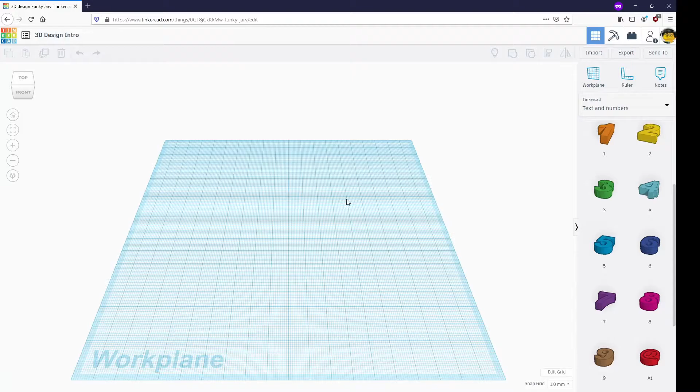My name is Mr. Martin, and today we'll be discussing some ideas for multi-piece prints and some tips on putting them all together. Let's get started.

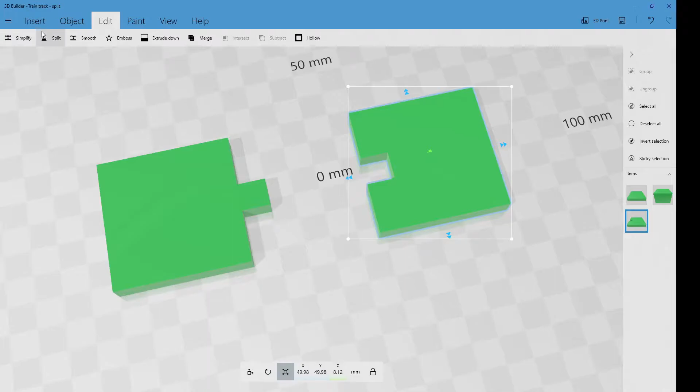First up, we've got a project that might seem pretty simple, but can be quite rewarding, and that is a puzzle. Yes, you can 3D print some puzzles. You can basically print the whole puzzle at once if you space out your pieces correctly, which is pretty nice. So let's say you've got an infant or a child, or even just as an adult, you want to create a really complicated one. You can start by making whatever shape.

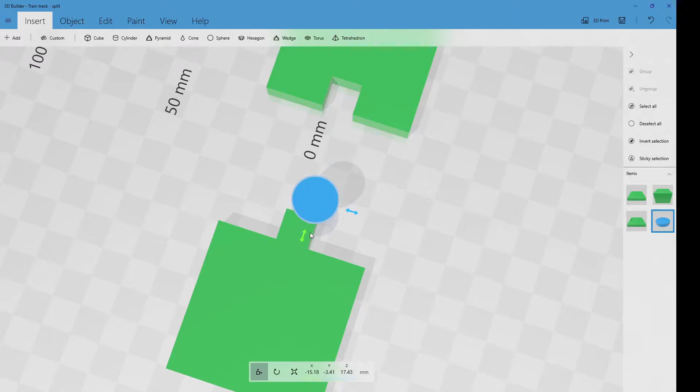Here we have two squares, and I've already done a kind of inlet. So you can see where the pieces will match up, and we're just going to add a round end to one of the pieces and then subtract that from the inside of the other piece. So for example, if you wanted to create your own map of the 50 states, you could do that. You can simply design every shape individually, find your own unique way of putting them all together.

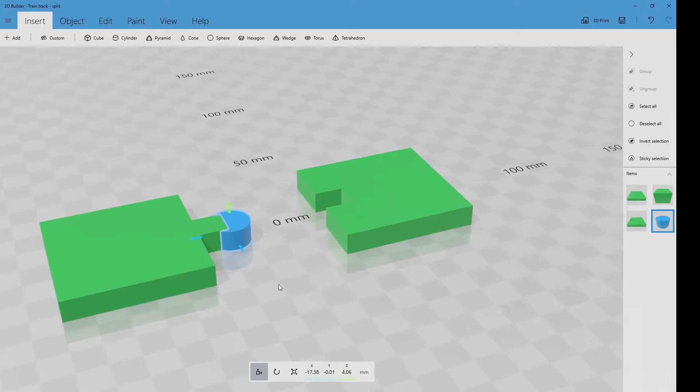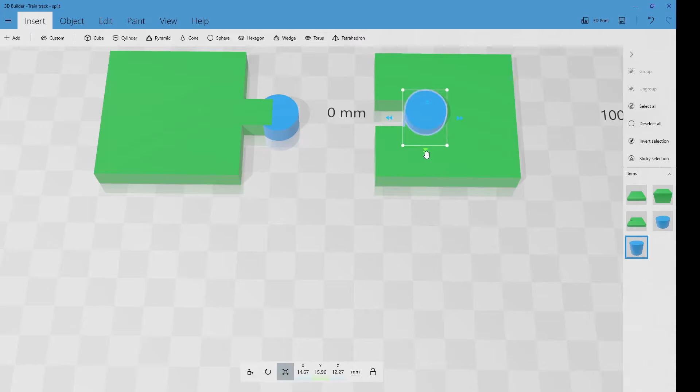And so in this case here, we're showing you how to just connect two pieces very simply, fairly quickly, and then you just repeat that process for every piece in your design. For a younger person, you would even then be able to add a handle on the top surface of every piece, further allowing them to create a simple puzzle that they can operate while still remaining challenging to begin with.

For more complicated structures that will remain relatively flat, for example, here we have this train set that's built into 3D Builder, the program we're using today. This already comes with some connectors, and this is just another example of how to put together these kinds of pieces. So you see here, you have that one standard connector that looks like two diamonds with a little rod in between.

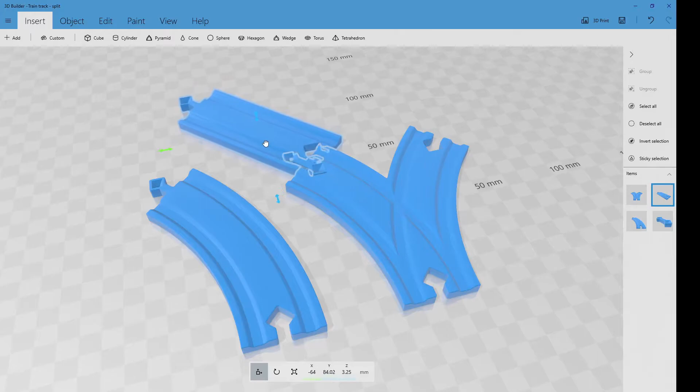And every single piece has either an inlet or an outlet, and that's what we're going to call them for now. And you'll notice how the pieces fit together. You can create your own custom ones on every piece in your design, which will help you put them together.

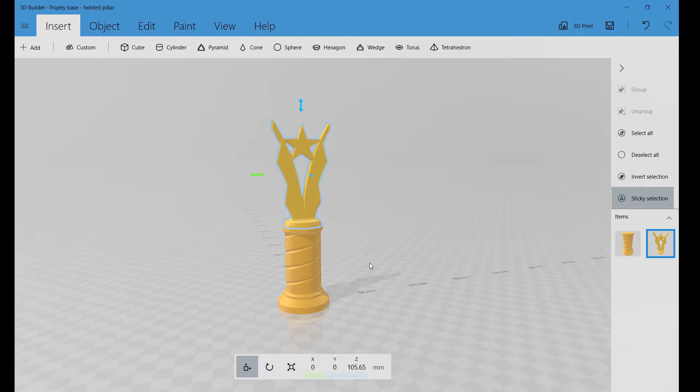And now that we've covered horizontal or flat prints here, what about something vertical? What if we wanted to put two long, tall pieces together? Well, here you can see that if we stack them, the pieces may combine. You can print it as one, or you can print them individually if you had longer pieces to connect. In this case, we're actually going to add a little cylinder to the top of the base here, and what that's going to let us do is create a bit more structural integrity where those two pieces connect.

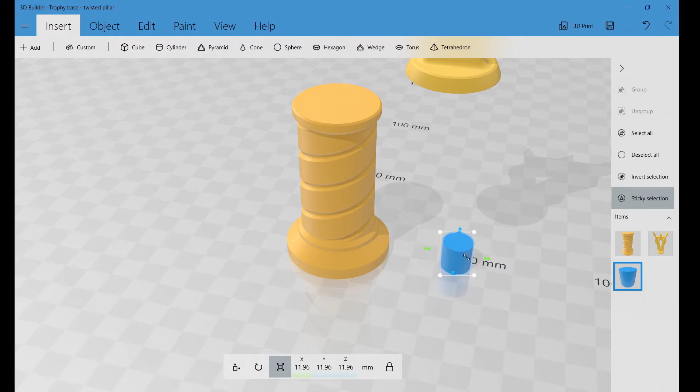Now, if we create a hole in the top portion of this, and it is the exact same size as this base cylinder that we're creating, with a little bit of magic after the print, either by sanding it down or heating or shrinking it to compress it a little bit, we'd be able to fit it inside to where it would attach very firmly without falling off. And that is the goal here.

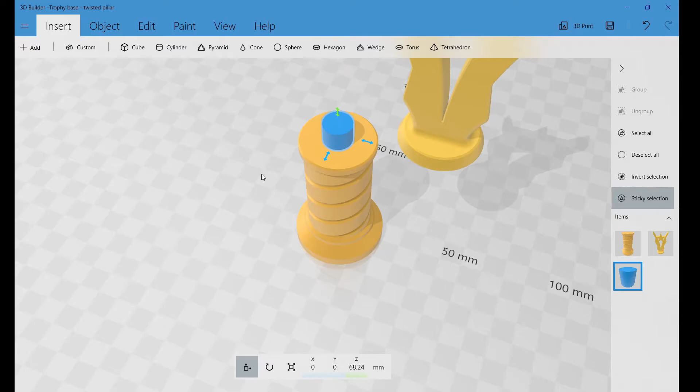So we're first going to attach it to the base, and then we're going to create a hole up top. So once we get this base cylinder to snap correctly, we're just going to resize it a little bit. It's just a bit too wide for my liking. That's going to make it a little bit more difficult to either sand down or fit inside the hole that we create up top.

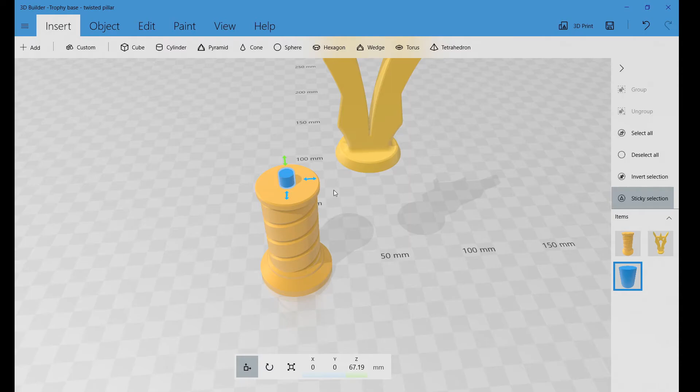And the important thing is to get the sizing done before you copy and paste it over, since we'll use that copied cylinder to create the hole on the top part. So it doesn't make sense to create the base and eventually have that be a different size than the hole you create up top. Then for sure your parts won't fit together.

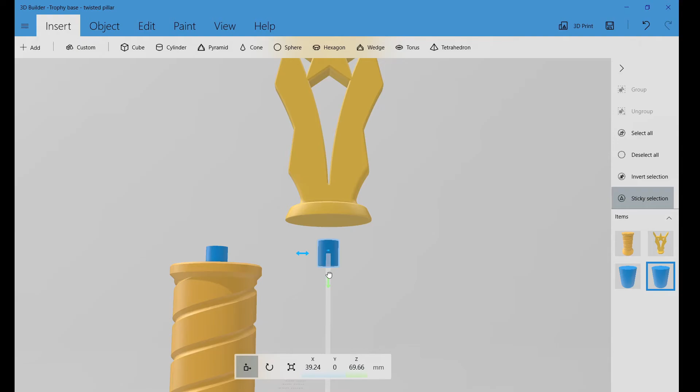So here, very simply, we're just going to move this on over. Obviously, it would not print as shown since we have an object floating in midair, which 3D printers can't quite do just yet. So we're going to line it up. Again, it does snap pretty nicely. And there are two ways to do this. Now, we could subtract from the top portion that I'm doing here, or we could reverse it, and we could instead create the hole using the base cylinder.

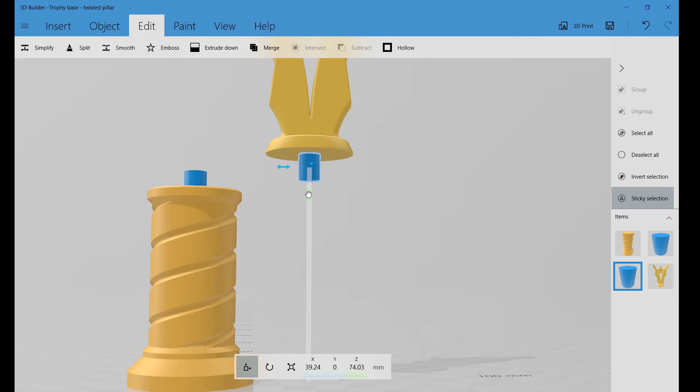So making sure that we have the right part selected here. Going to deselect the top portions here and only select that base cylinder. So here we've got it lined up. Deselect those and use the subtract tool here so it gets rid of that space on the base.

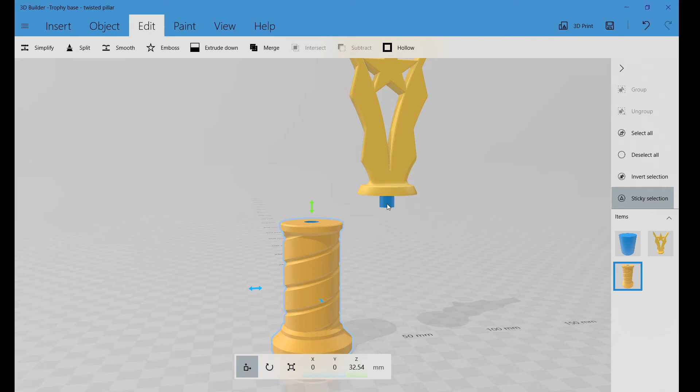Now, once again, moving over to the top portion, all we have left to do is to just slide this into place. And you would note that if we were to print these, then those two pieces would fit very snugly together to the point where they would become one piece.

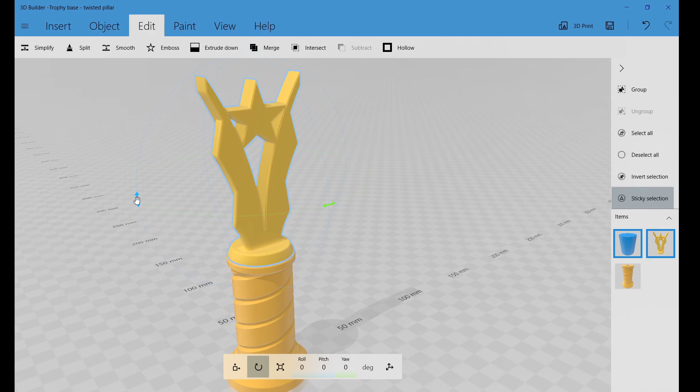Now, the reason you'd want to do this is it would take forever, or your printer can't even print something that is quite tall, let's say a foot tall. It's going to take you a while to print something like that. So let's say you had a lightsaber, or even printing something like a spoon. This would be one way to put those pieces together. So that does it for today's video.